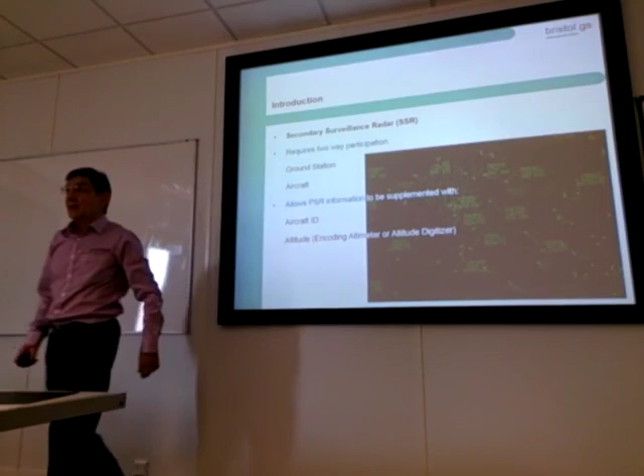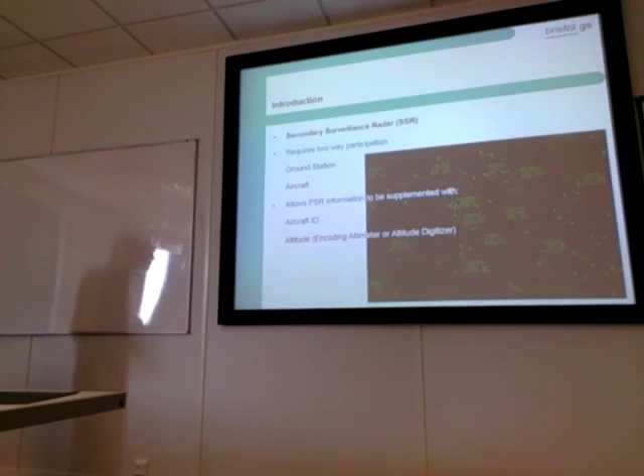But it does need cooperation, if you like, because the airplane needs to respond. So if you're talking about a military device, to see the enemy coming in, then it wouldn't work, because clearly the enemy is not going to make a response, and therefore you wouldn't be seen. So primary radar we still need for military. We need that phased array aerial. Remember, the very first day we had the big radar dish, and on top of it was the aerial with all the lines on it, which is the phased array aerial.

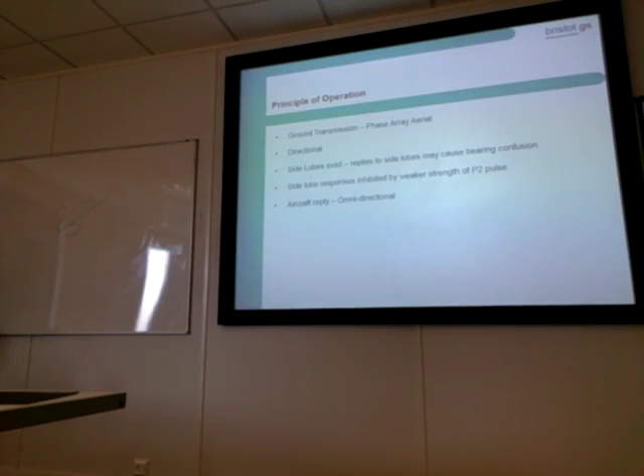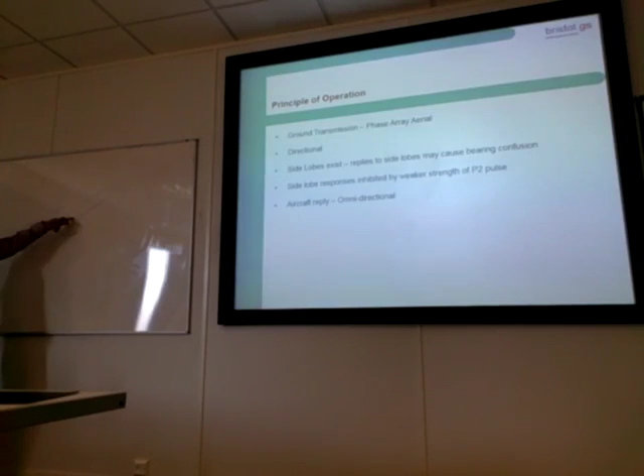And we do have a problem with side lobes because it is a directional aerial, and we have to sort that out. So I'll talk about that now. So that's the transmission that you're trying to send. Unfortunately, there are side lobes. Now, I know that looks a bit funny. I cannot help that. Doesn't matter what you do, it's still going to look that way. But this is what we call the interrogation lobe. You are here in your airplane. This is going round and round on the radar dish. The interrogation comes and you make a response to it.

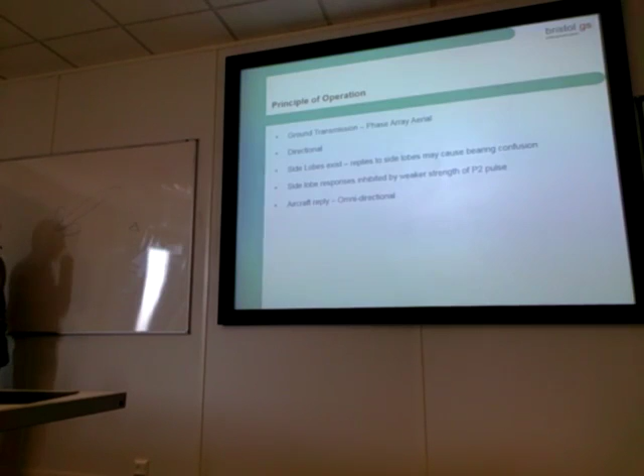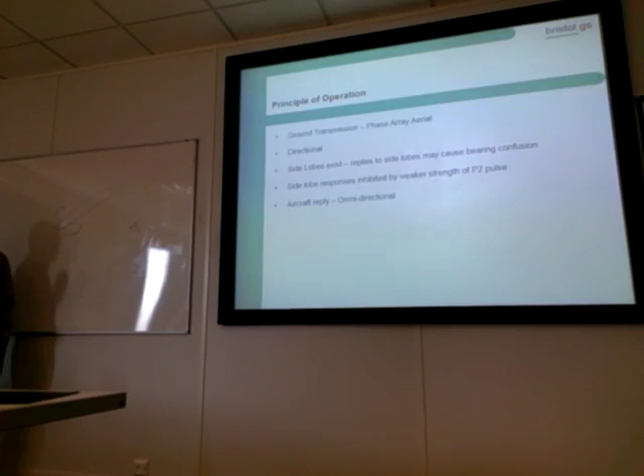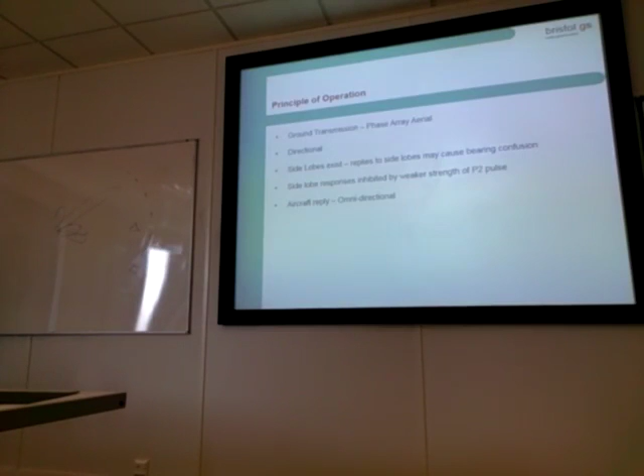The problem is that when you get interrogated by that side lobe, you will respond to it. And there are lots of side lobes. Remember, we said there are loads of them. So all the way as that's going round, you are going to appear as if you are in all of those places, because you're responding to every side lobe that comes along. And obviously that's of no value to the controller, because you appear to be everywhere.

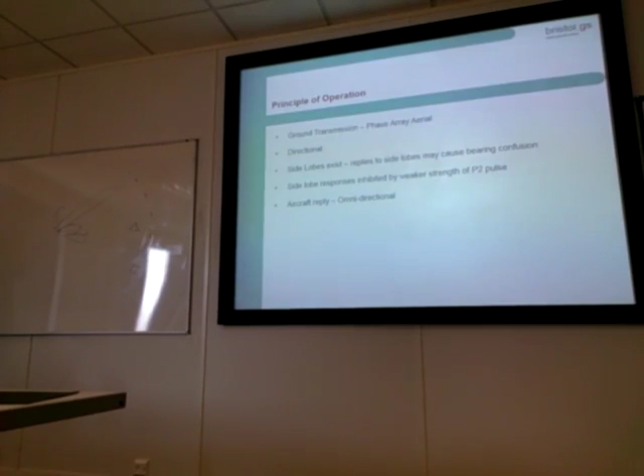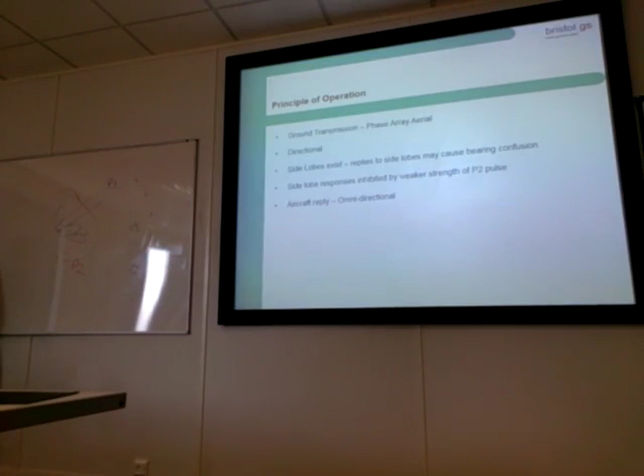So they have another pulse, which is shaped something like that, that goes around with it. That is known as a P2 pulse. Perhaps I should have said that is known as the P1 pulse. So the P1 pulse is the one that we want. This P2 pulse is designed to be stronger than any side lobe.

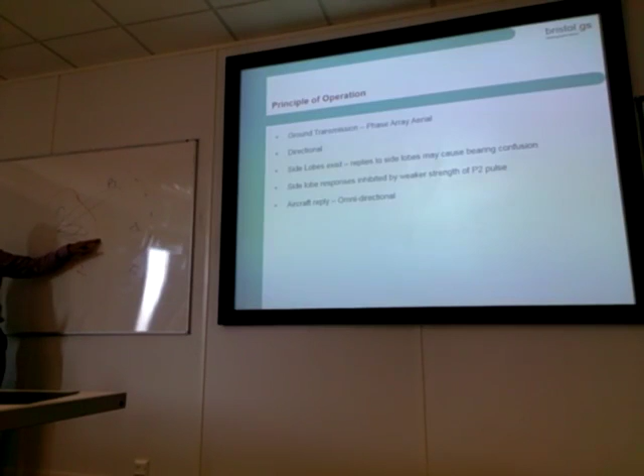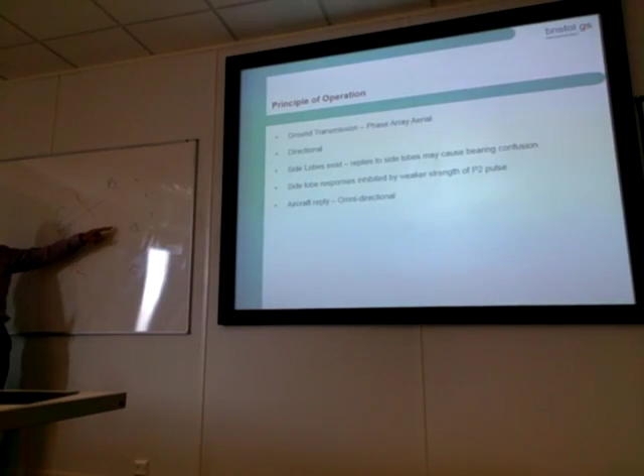So when your aircraft gets an interrogation, say from a side lobe, before it replies, it asks a question. Is that interrogation stronger than the P2? And if the answer is no, it doesn't respond. So I will not respond to any side lobes. However, when this one comes round, it asks that question, is the P1 stronger than the P2? The answer is yes. So it will respond. That is known as side lobe suppression. Side lobe suppression.

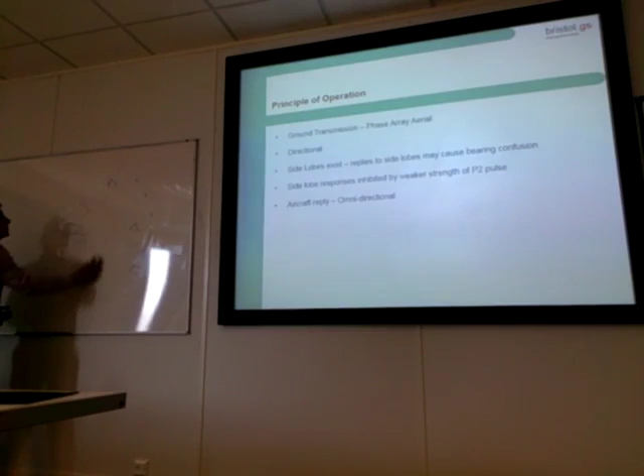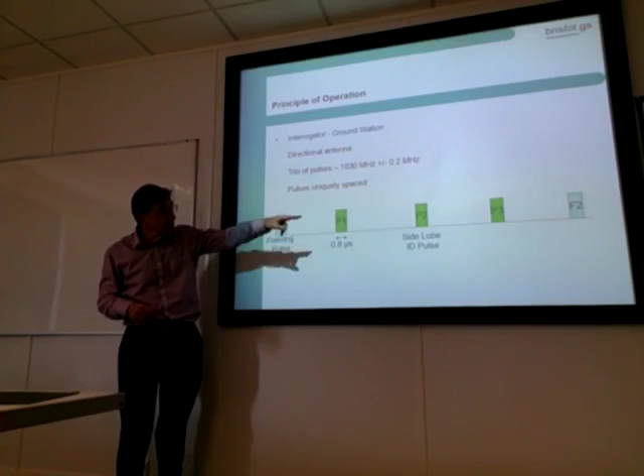So how does this interrogation come? Very simply, in a series of 3 pulses. Well, 3 pulses plus a framing pulse. But these, the framing pulse and an end pulse, those are like saying, this is the beginning of my transmission, this is the end of my transmission. I'm going to talk to you, I've finished talking to you.

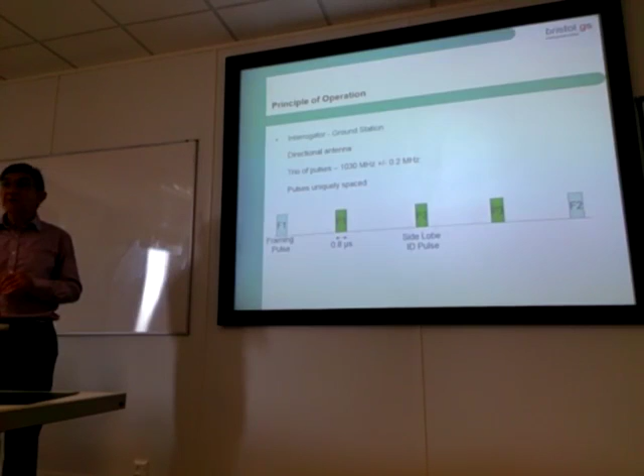First pulse is the P1 pulse, that's the interrogation pulse. The second pulse is the P2 pulse, which is the one that is there for side lobe suppression. And the third one is about give me your altitude, or if it's not there, then I don't want your altitude. And that is going round, and they're spaced, and that is that.

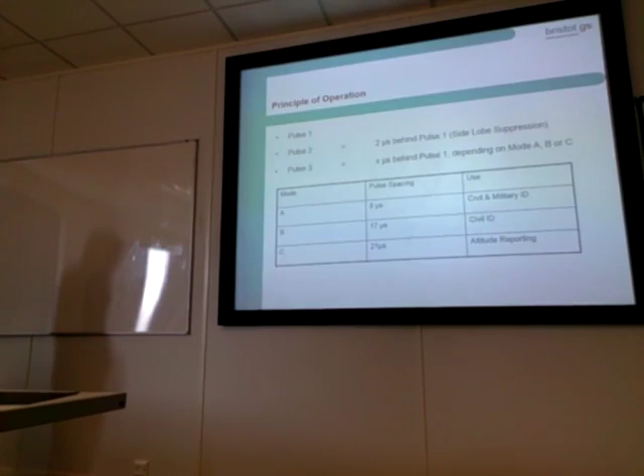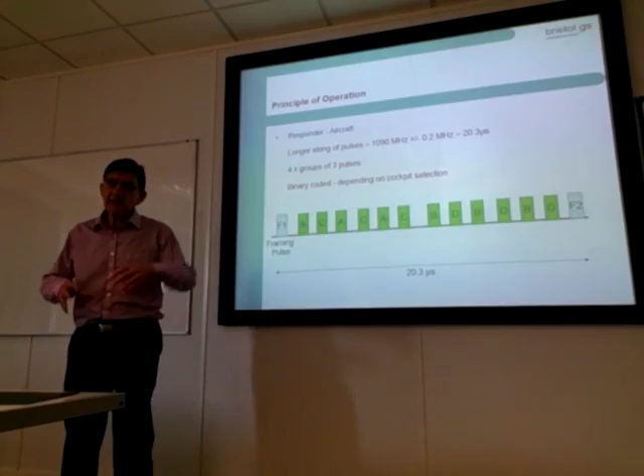How does your aeroplane respond? Let's get rid of that one, we don't need that. But your aeroplane responds with potentially a lot of responses. The framing pulses, they will always be there. This is the start of my reply, this is the end of my reply. These ones will be there only if they're required to be there to make up your squawk.

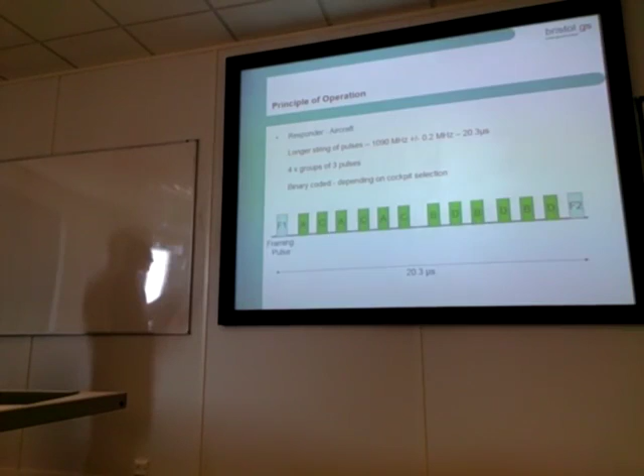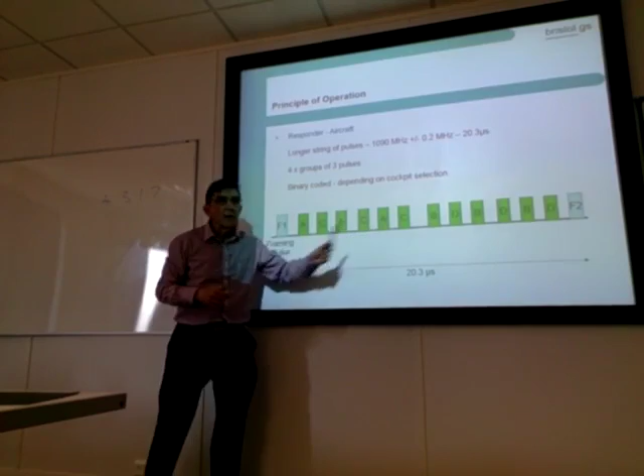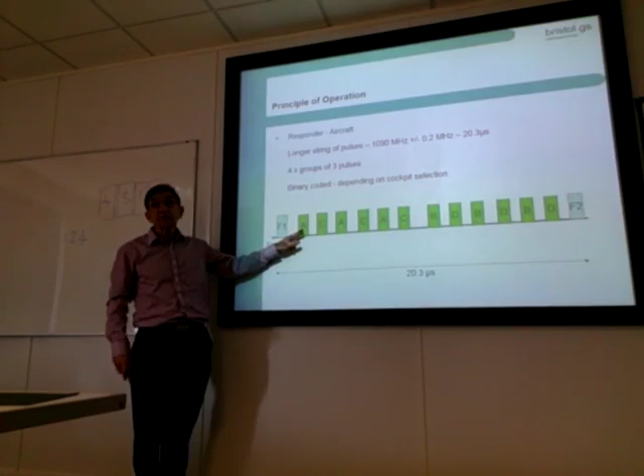So, say your squawk is 4317, just for example. Then each of these A's, there are 3 of them, will be used to make that first number. The B's will be used to make that number, the C's to make that one, and the D's to make that. So there are 3 of each. And their values are 1, 2, and 4. So this one has got a value of 1, for example. This one has got a value of 2, and this one has got a value of 4.

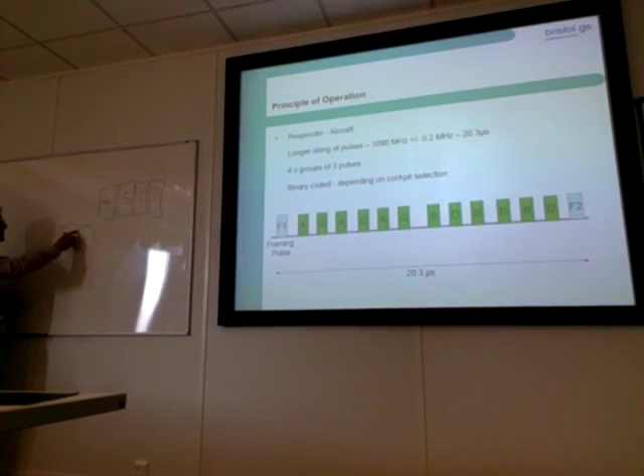So in this case, I have to make up a 4. So clearly, I will transmit only that one. The first 2 pulses won't be transmitted. With this one, I need to make up a 3, so it will be using the B pulses. But to make a 3, I will transmit those 2, but not the 4. Get it? And to transmit the 7, then I need to transmit them all. So that's how the transmission works. You're not going to be asked about that, but that's how that works. So it's quite straightforward.

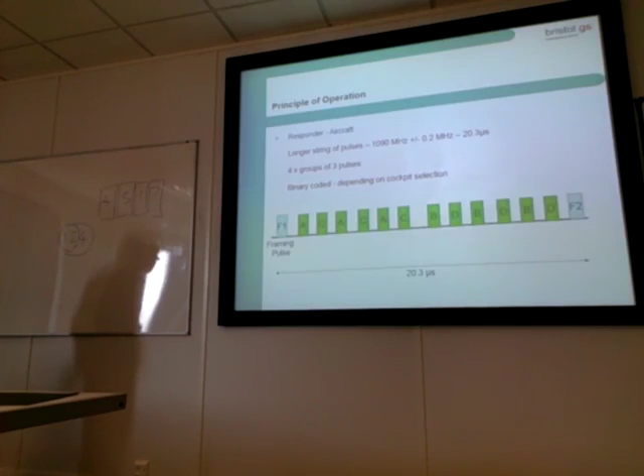The sides here, they're largely irrelevant, but this number there is not. Because we're using the number 7 rather than the number 9 to make up our numbers, we can't have as many numbers. You might think, oh, 4 numbers, I can get 9,999 combinations. But because the maximum number is 7, I can actually only have 4,096 combinations. And sadly, that does get asked quite a lot. 4,096 is a vital number until you've passed your exam, and then you'll forget it.

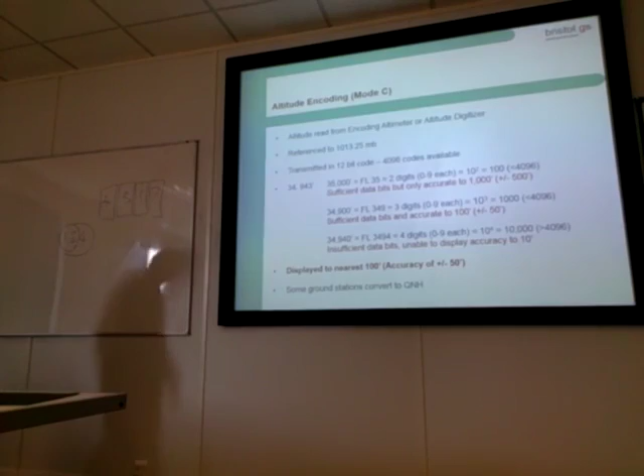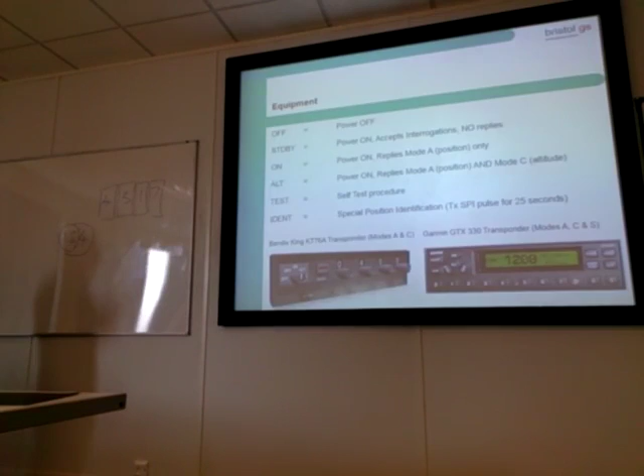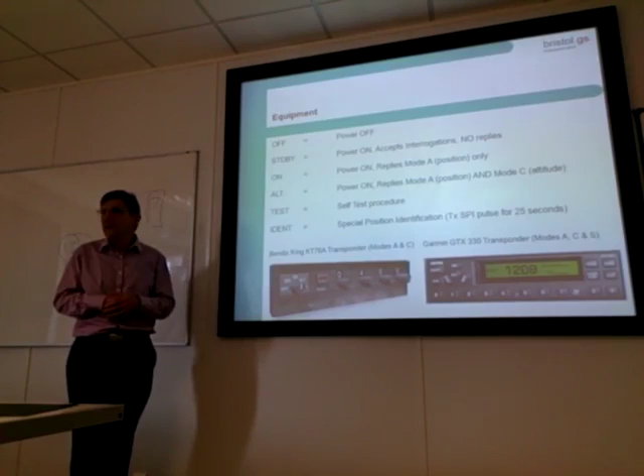What selections do you have on your box? Well, on and off, and then you've got a standby. So standby allows the equipment to warm up, and it's coming really from older type equipment that used to take a while to get warm. Standby, it's warming up, but you're not transmitting. So it's accepting the interrogations, but not doing anything with them. Once you switch it to on, then it will start to make the responses.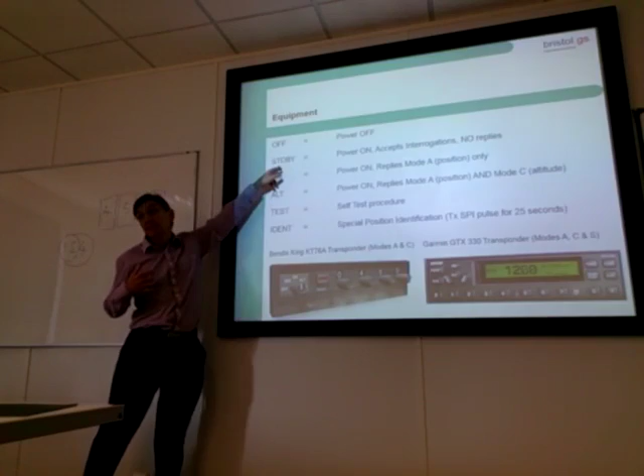What does it mean, accepting interrogations? It means it's taking them in. It's listening, but not replying. Okay, but usually the transponder is listening what? It's only while it's in standby. Once we switch it to on, it then starts to reply as well. Get that? So what's... I don't understand, because we will not get any information from the standby.

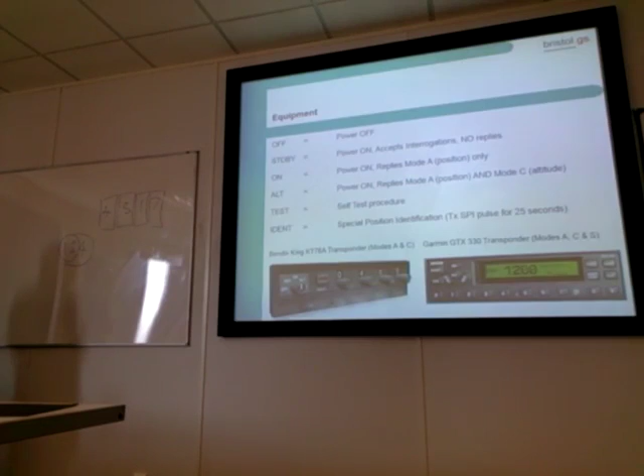This is your aircraft equipment, and you're being interrogated by the station on the ground. So here's the interrogations, but in standby it won't transmit. So you have this really while you're on the ground, because what you don't want to do is be transmitting and damaging people. That's where it's all coming from, really, because it's still coming under the term radar. So what's the use of it? Standby. Never used it. Change the code, isn't it? Yeah. Or you can use it to change the code, but even then you don't need to.

It's coming largely because it is a radar, and in radars we have a standby mode, because if you're in normal transmit mode, you do serious damage to people, and historically this is still radar. It's a secondary radar, but radar. So can we just go from off to on? If you wish. Or put standby. I don't get why they put standby then. Because you're not transmitting. Just put it off then.

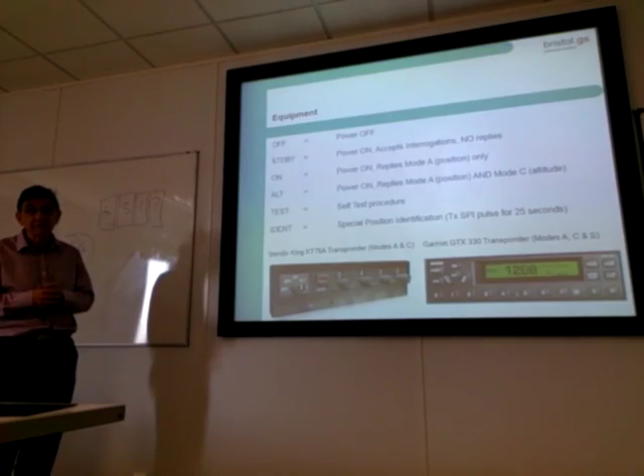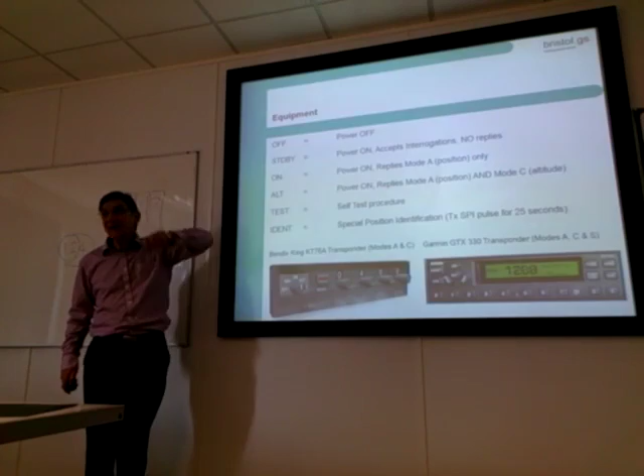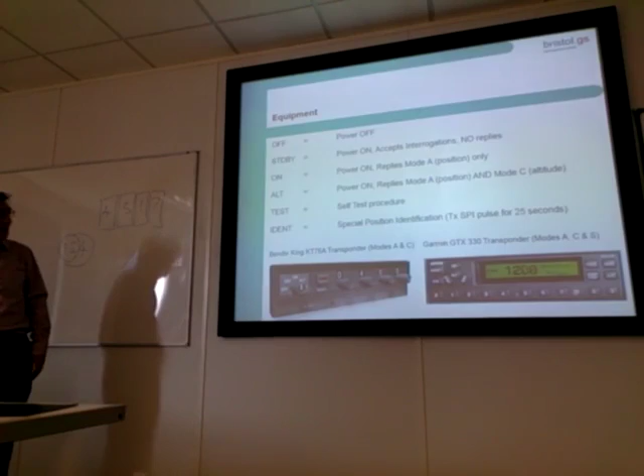Not alternate, but altitude. So on old aeroplanes, you might see the word mode Charlie. So it depends on the age of the aeroplane what you're going to see there, but it will reply to altitude. More modern equipment has got a self-testing, so it will test itself. And then we have this other position known as ident.

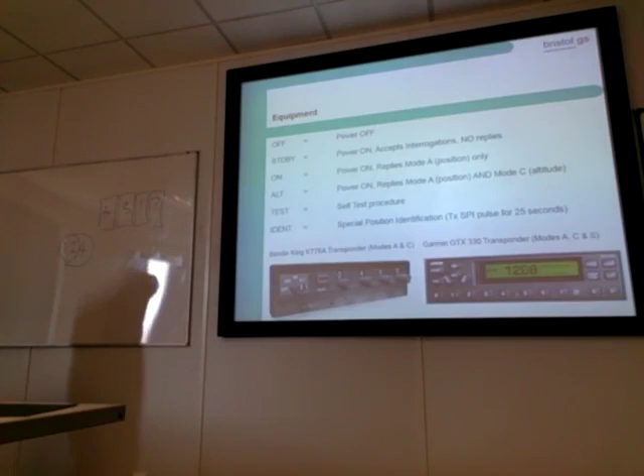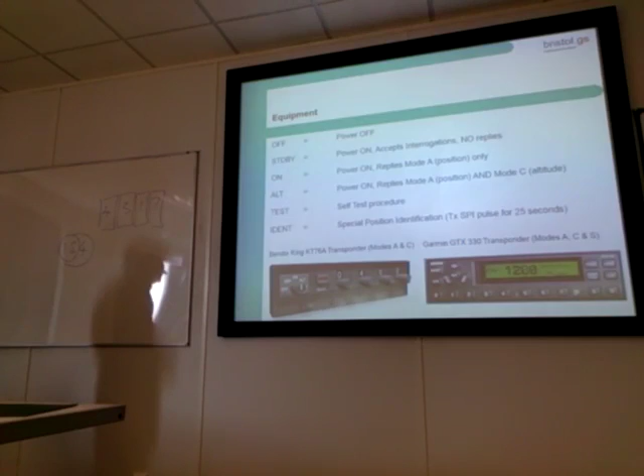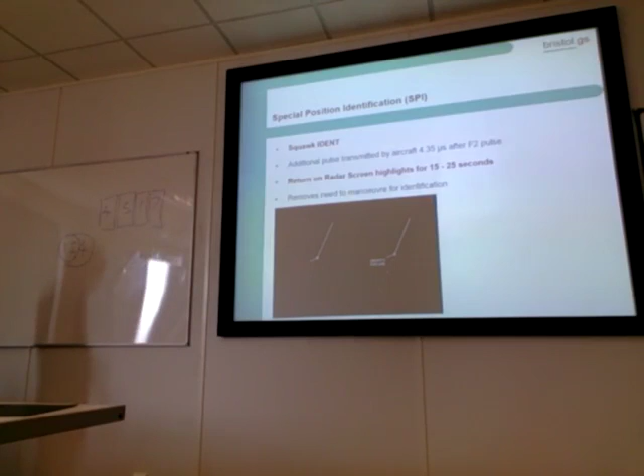Codes. I think we're probably okay with codes 7500, 7600. I imagine we're okay with the codes. I'm not going to dwell on them. Yeah, we talk it all the time. Errors with the system then.

So ICAO standards are to 300 feet. When you're climbing out to go en route, air traffic need to know that your mode Charlie is accurate. So they will ask you for a mode Charlie check and may say, call me passing this level. So on the way up, you will call them up and say, hello, blah, blah, passing flight level 70. And they will be looking at their altimeter readout. If that reads within 300 feet of 7,000 feet, then the mode Charlie is okay.

So minus 300. Pardon? You should read out minus 300. 300 feet. That's supposed to be a little symbol that we use for feet, that little apostrophe. You can do plus or minus, just with it. Yeah, plus or minus.

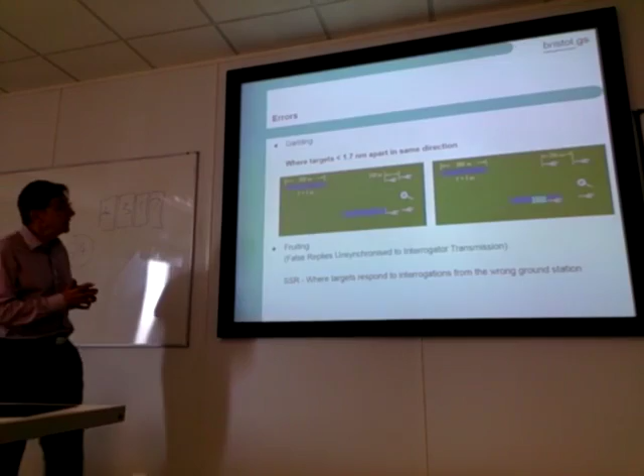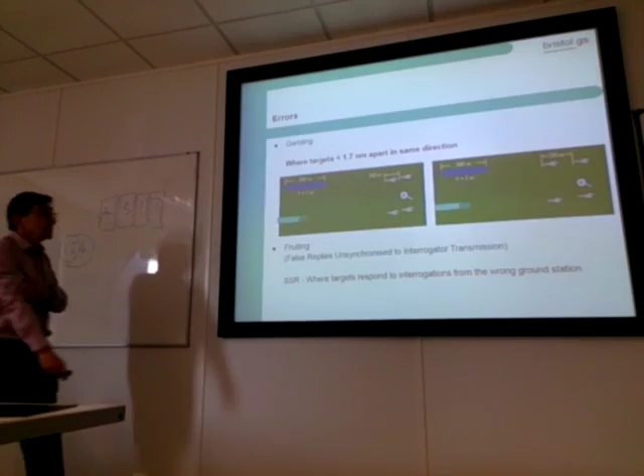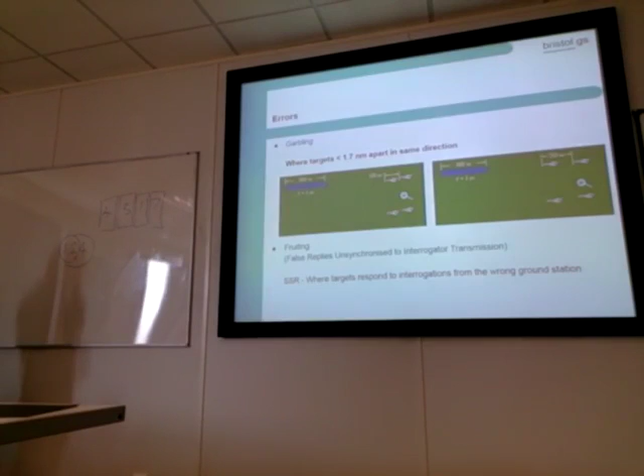Problems with it? If aeroplanes are too close together, then messages get jumbled up. And it would be like a garbled message. Two people speaking together, you can't make out what each of them are saying. So it becomes a garbled noise. And the magic number for that is 1.7 nautical miles. If they're within 1.7 nautical miles, then the controller is going to have a garbled message.

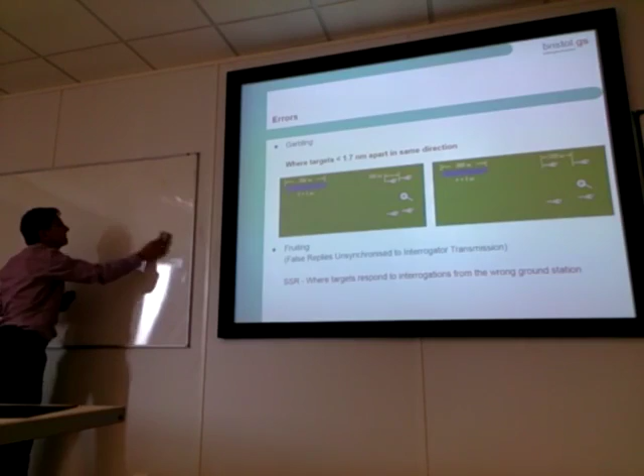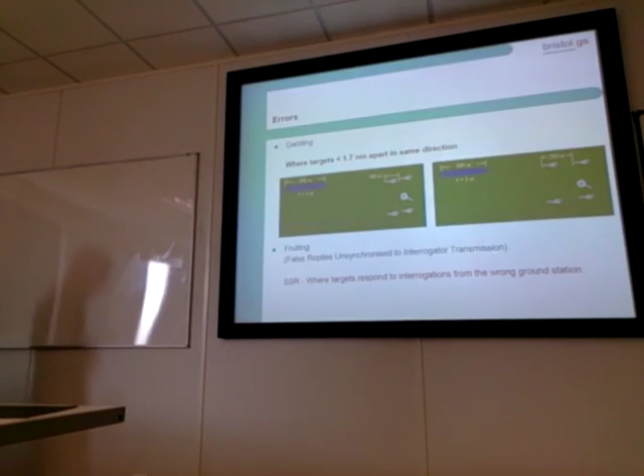Fruiting is when your airplane might make a response. So you've been interrogated and you've made a response. Your response from the aircraft isn't directional. The interrogation's directional, but your response is omnidirectional. So another SSR somewhere else might pick up your response. And clearly that was an undemanded response. So that is known as fruiting. Responding to the wrong ground station.

Mode S is where we're going. So currently Mode S and the old SSR have been made compatible, but the SSR will disappear as Mode S develops. So they're just an interim measure, if you like. But Mode S has got massive capability, lots and lots of addresses. 16.7 million. Now, they say that's massive.

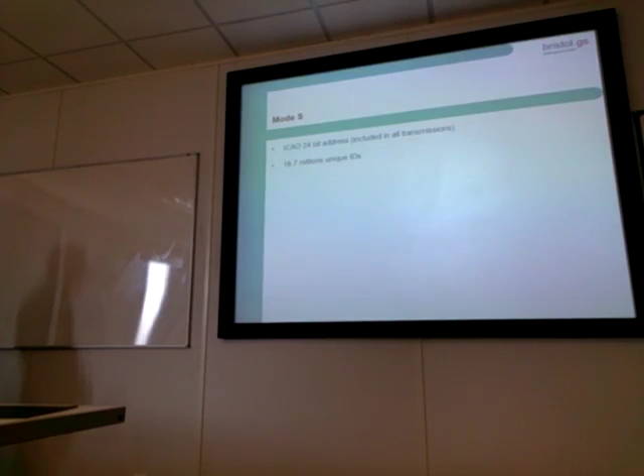I remember when the internet first came out and people would talk about its massive capability, and within a couple of years we were all whinging because it just wasn't enough. And no matter how fast and super fast we go, we're always whinging that it's not fast enough, aren't we? It's just not good enough. So I kind of imagine it's going to end up being the same with this, because they'll find more and more uses for it.

For surveillance, it's good because we can go over the horizon. Radar is VHF or above, limited by the curvature of the Earth. If we go data linking, this is a data linking system, we can have ground stations, we can have satellites, and so we can get surveillance over a much wider scale. And more accurate too, because the position of where you are is actually coming from your FMS. It's saying, I am here, which is a lot better than a radar range and bearing. So the accuracy is going to improve tremendously.

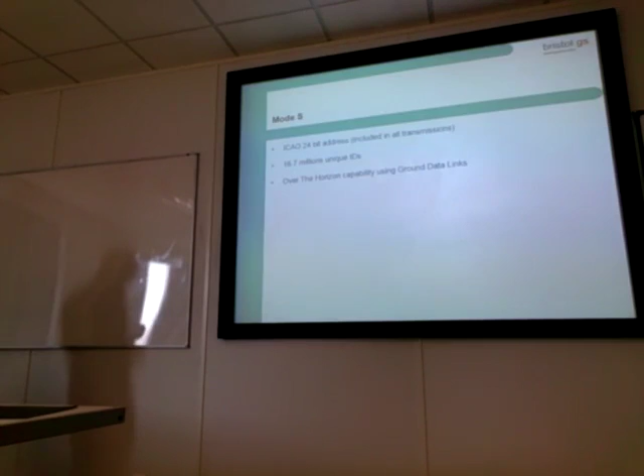We can have messages, and they are anticipating that whatever system it goes through, whether this or ACARS, before long the only verbal communication will be clearances to land and take off. Everything else apart from that will probably come effectively by text.

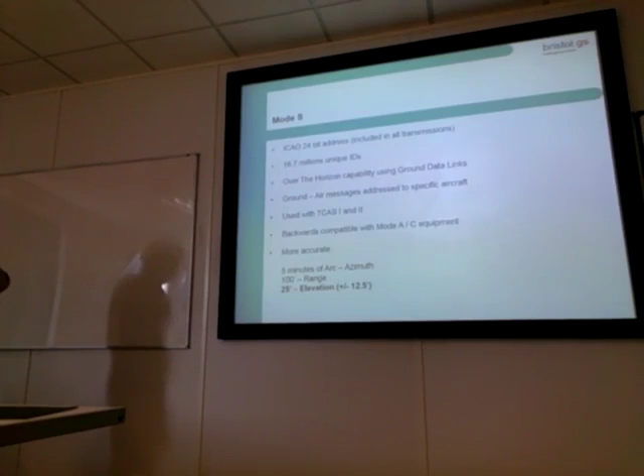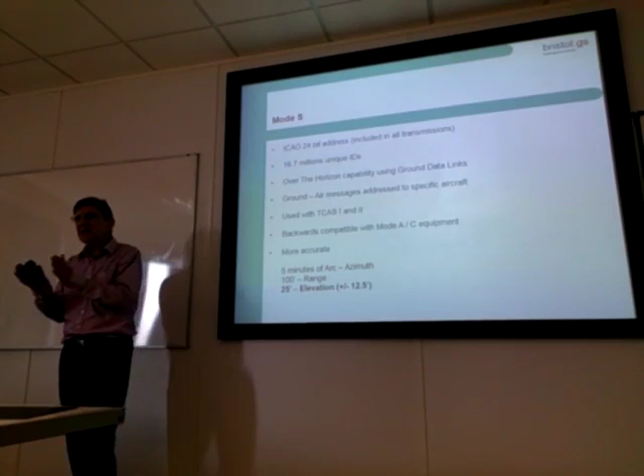Compatible? Obviously compatible with the old stuff, which will disappear, but its accuracy is much greater: within a 100-foot range, elevation allegedly 25 feet, and 5 minutes of arc, which is really small. Remember, VOR is 5 degrees, so it's 60 times better.

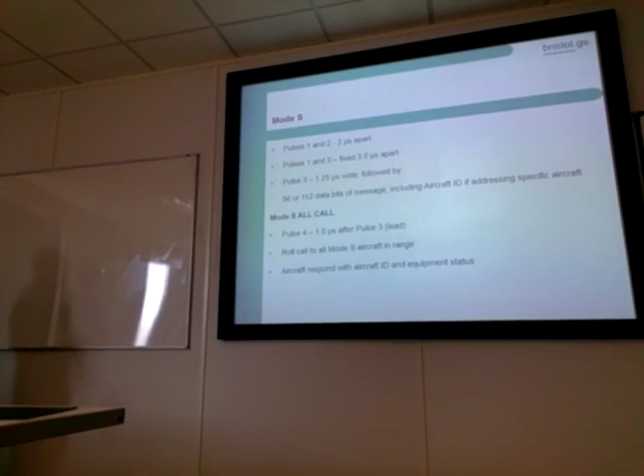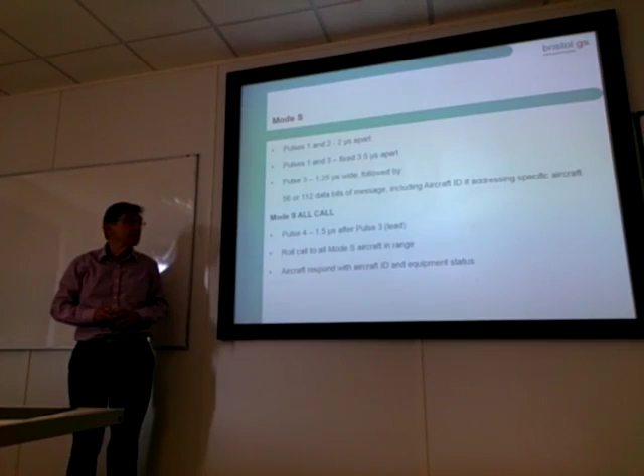Where do we need to know? We don't need to know that. We have the ability for Mode S all-call, so the ground station can make a transmission to everyone, or it can call a specific person. So that's the 2 bits you really need to get from there. So there may have been some message that everyone needs to know. Unlikely, perhaps. Or mainly it's transmissions to individuals. Even to the point where individual aircraft, so this Cessna, whatever it is, has an address.

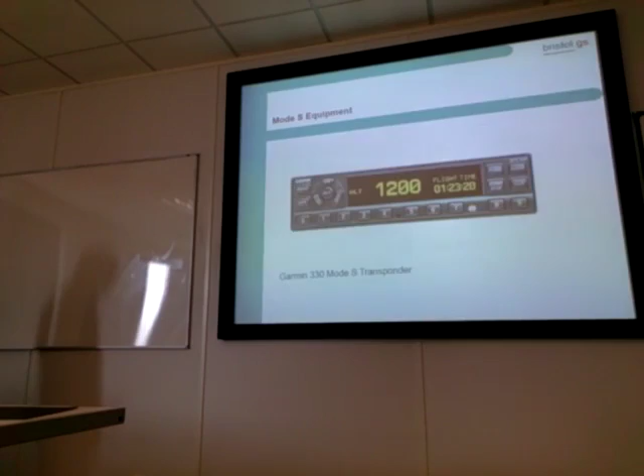You know, immediately I'm going, oh, well, you can use that for policing then. You'll know whether this aeroplane has a certificate of airworthiness, for instance, and know that it's flying. I think it's going to get used for an awful lot of stuff as time goes on. What do you need? You need boxes. You're going to get bogged down by boxes of various sorts, and that is SSR. It's been a rush.